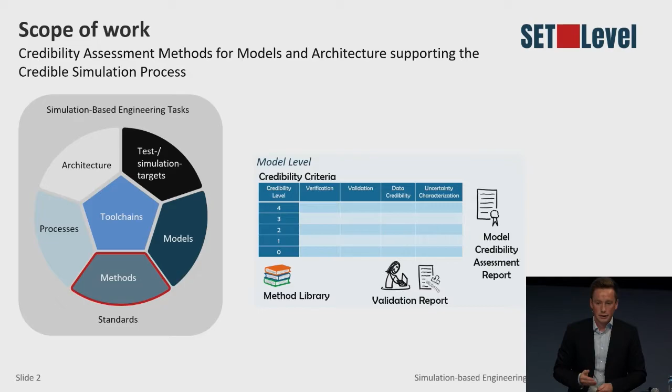For that, we elaborate on different credibility layers, since from our point of view, the assessment of the overall credibility of an automated driving system simulation environment can be structured into verification and validation activities on different levels. As you can see on the slide, these are called model level, coupling level, and simulation platform level, which at the end provide all evidence for the credible simulation process, which is wrapping around all these layers.

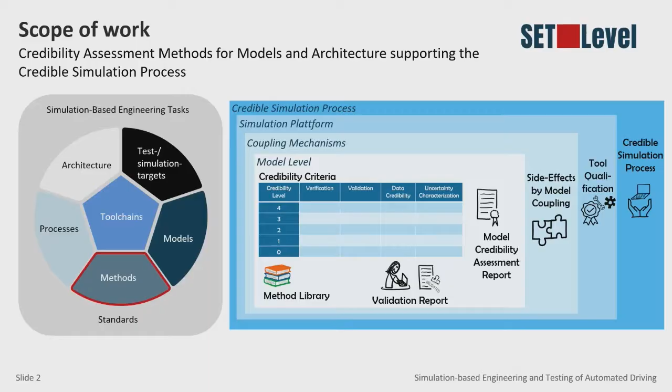So let's take a deeper look at the first layer, which deals with model credibility in the following.

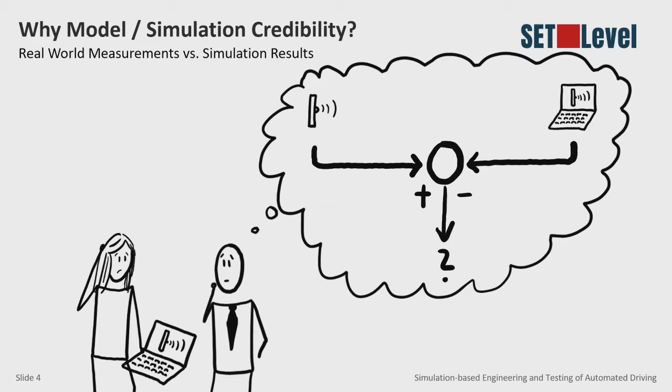I think all of us would agree that using simulation-based methods is inevitable for the safety validation of automated driving systems. However, the intrinsic challenge is that additionally to the actual goal of validating the safe behavior of the automated driving system, this requires a validation of the results generated by the models and simulation itself in advance. And since we know that ADS-equipped vehicles are highly complex systems operating in an even more complex environment, including multimodal interaction with third persons, the question arises: do you trust the results of your models and simulation? And if yes, why?

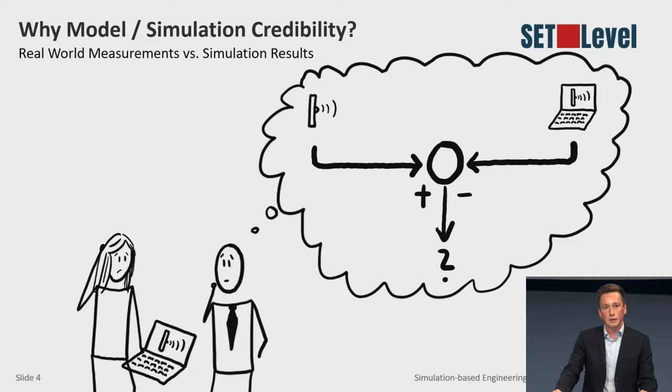Taking a look at the literature, the scientific community, or organizations like NASA or the American Society of Mechanical Engineers, there is a thorough discussion about that topic. The term most often used for activities in this context is credibility of modeling and simulation.

Model credibility refers to the decision maker's confidence in the model. One goal of the validation and verification process is to gain this credibility, for example according to Carson. Credibility is the quality to elicit belief or trust in model and simulation results, according to NASA.

Using these definitions as an example, two major challenges arise. First, determining the degree of credibility is a partially subjective decision that depends on many factors. Second, the decision on credibility depends heavily on the modeling and simulation user's perspective, the respective development task, and of course the application purpose. At the end, the user will ultimately decide whether he or she trusts the model and the simulation results.

So of course the question arises: what can be done to overcome these challenges and to reach that credibility? On the one hand, in our opinion, it's essential that the model developer and the model user interact during the overall model development and operational phase. Thereby, it is of paramount importance that both agree on the purpose for which the model is built and its underlying assumptions.

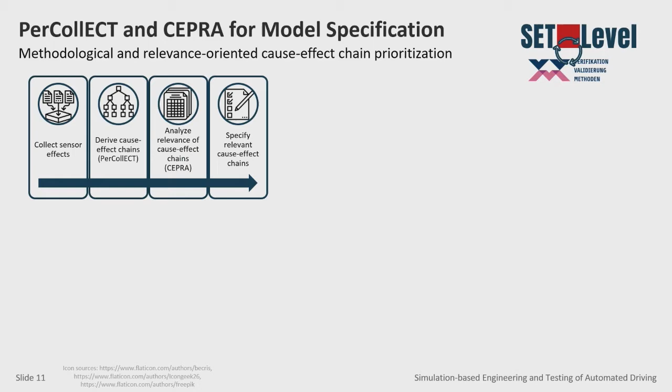So before I start again, I would like to stress that especially the model validation, the LiDAR sensor model validation, was a collaboration between both projects, SET Level and VV Methods, and as Nico said, this is necessary that there is a collaboration between the model user and the implementer. So when we speak about this

four-stepwise sequential process, to repeat, you have to start with collecting the sensor effects, so literature review, or what would be even better is to have a lot of different measurements at hand. You have to sort them in a tree-shaped manner, in this case the PerCollECT tree. We came up with this in the SET Level project to start the overall activities for sensor model specification, because as we started, we found there's no method available, and we need one to get started.

It's also a bit of a timing issue that the VV Methods project was started a little bit afterwards. So even if they used the model and had to specify it and did this exemplarily, we had to come up with something to get it started.

So PerCollECT is a collaborative activity actually, and we've put this on GitHub. You see this not only for LiDAR, also for camera, for radar. We would like to also add ultrasonic sensors as well.

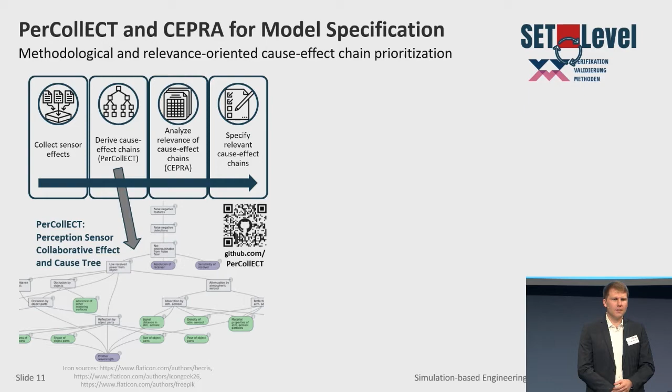And again, you start with the phenomenon or phenomena on the top, for example, false negative objects, and you go down to not recognized or false negative detections in the point cloud, and then down to the causes and design parameters of the sensor.

The next step is to fill the cause-effect phenomenon relevance analysis, to consult the experts for the sensor, to know the ODD, where the simulation takes place, all the different environmental conditions and objects that could occur. And you have to consult a system under test expert or expert group, and then you can derive and sum up both scores for occurrence and for impact, and you finally end up with the relevance scores.

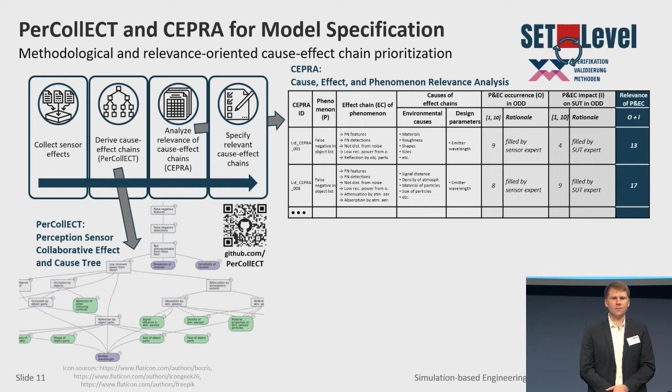And as I said, we are very happy that actually the VV Methods project took this method and all the different steps and did this exemplarily, performing the specification of a model based on this. If you would like to learn more about this, you can still visit the experts at the booth.

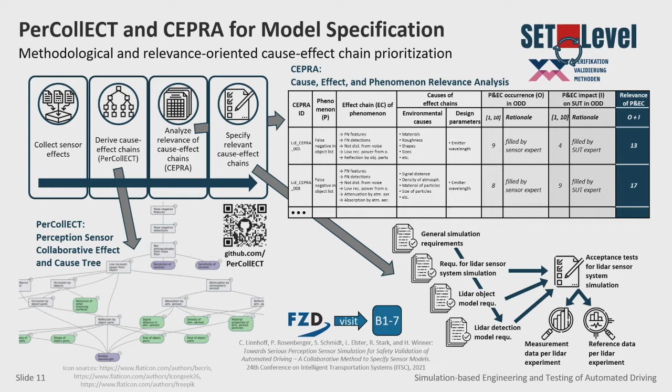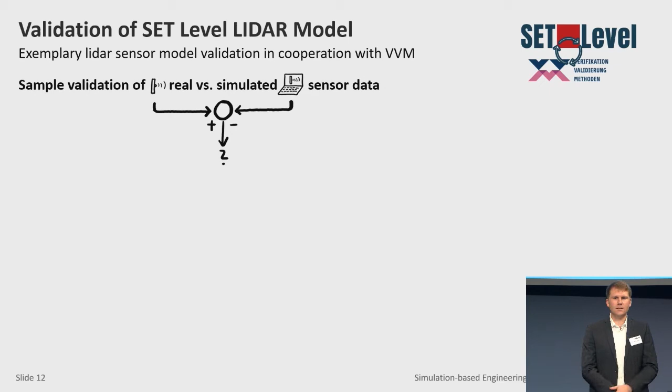The next step is, once you have specified the model, to validate it. Validation in this case means to compare real and simulated sensor data. So how is this done? What do you need? Of course, you need the data collection. You need to collect the sensor data, so in this case, the LiDAR data.

You use tools that are very precise to know where the sensor was located, and you have to collect the reference data as well. For example, the distance to other objects, the object materials, and so on. In this case, for example, for the distance, a tachymeter was also used to have the high accuracy in the reference data that is needed.

Then you need some metrics to compare the real and the simulated data. And in this case, when you speak about sensor data, it's not only to compare specific values and the scattering, but also you have to compare the scattering itself. So there's a model bias, which is the mean error between the simulated sensor data, and there's also the scattering error. So the scattering of the real sensor and the scattering of the simulated sensor, they must fit.

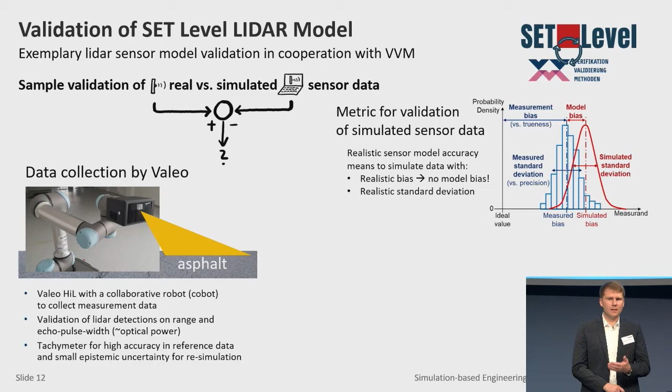And when we started, there was no metric, so we had to come up with a novel metric to use this, and we did an analysis on a lot of available metrics, metrics that were used already, but none of them was fulfilling our requirements, because we needed a metric in the unit of the measurement to be able to actually specify the error.

So in this case, for example, when you speak about distance values of the points, of the detections or the objects, then you need to specify, okay, I would like to have a simulation and it should only be different in the mean error and in the scattering in about, let's say, 10 centimeters or so.

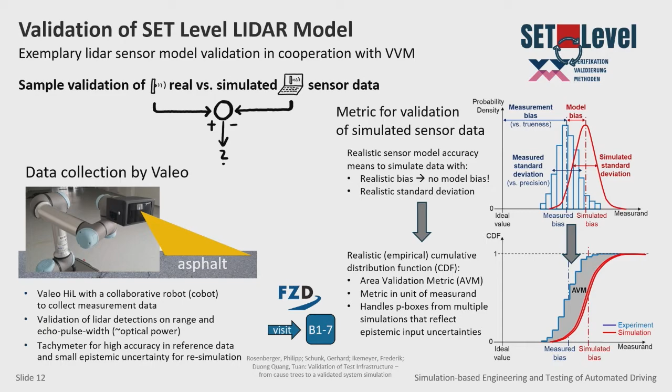And you also need to have a metric that can handle probability boxes from multiple simulations, because you have to reflect your reference data accuracy by multiple simulations for the epistemic uncertainties that are inherent in this. So finally, we found a metric, and it's also possible to consult our expert at the booth for this, or afterwards via email.

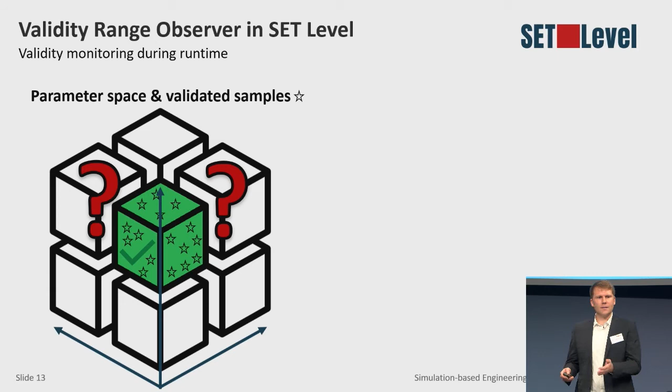If you have different validation measurements done in your specified ODD, you'll have samples from the parameter space. For these samples, you took measurements and can compare them against synthetic data, so in this case it's valid. But it's not enough. You also need to know about the rest of the parameter space where you have no samples for validation. So somehow you need to know if your model is still valid there as well.

The validity range actually cannot be guaranteed a priori. For example, in closed loop simulation, you start with scenario conditions like different velocities, different distances to objects, different objects, materials, and environmental conditions that can change. If you just have open loop, you can probably check beforehand if all the different parameters are still checked and the model is valid. If not, you need to observe this, and monitoring model validity is then required.

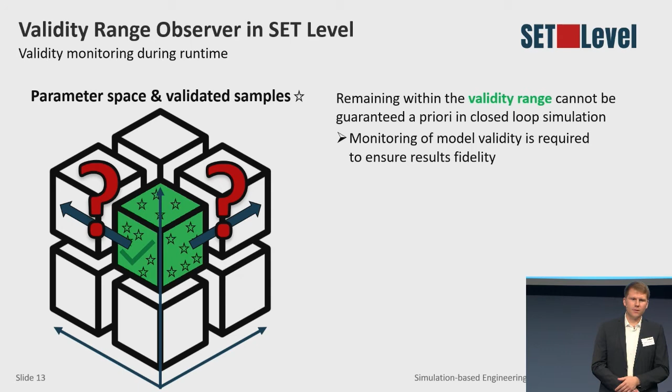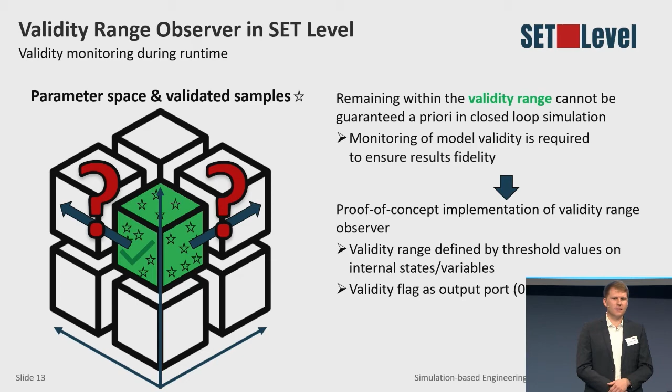A proof of concept of this implementation, in this case for vehicle dynamics, has been done in the SET Level project. The validity range in this case was defined by threshold values, internal states and variables. There's a validity flag, a simple approach to output whether it's still valid or not valid anymore. Again, please visit the experts at the booth for this.

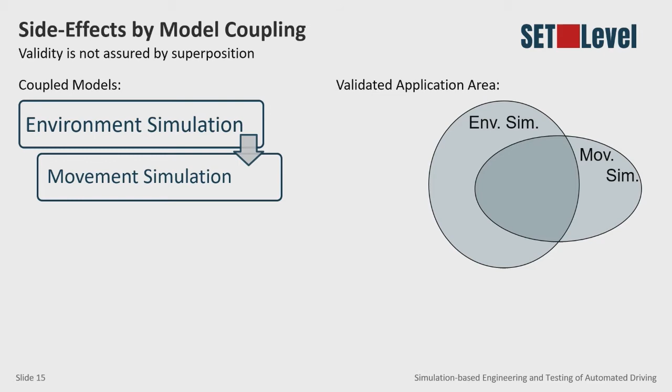So the next step, once we have all this done, we have the different models validated, and we even know about their validity during application, we will combine different models. What are the side effects of model coupling? In this case, for example, you have an environment simulation, movement simulation of different objects, vehicle dynamics, sensor simulation, and the system under test, in this case an automated driving system, all in closed loop. So yes, every model has a parameter space where it's validated and fulfills the requirements, but what about coupling all these?

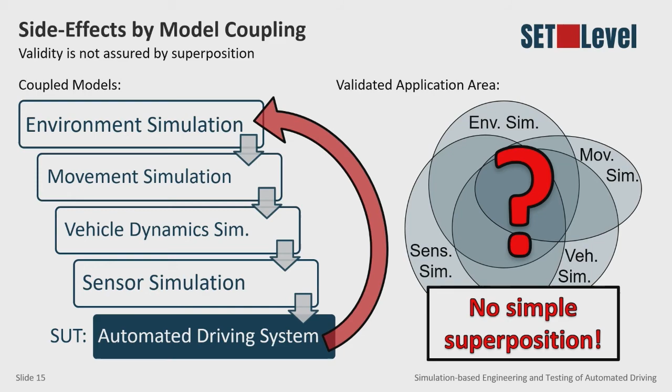Of course, it's not just a simple superposition where we know all of their validity areas and can just combine them. We have to investigate this, especially when we talk about models from different developers and sources, for example provided as functional mockup units, as we did in this project. They're black box systems, you cannot look inside, you can just couple them, and you hope they are valid, or at least you should investigate if they are valid or not.

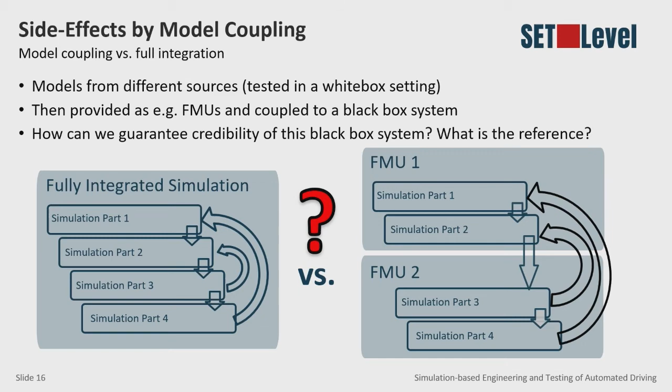How can this be done? This is a question that came up during the project. We did some first investigations, of course. You have different types of model coupling. For example, you have one model for vehicle dynamics all in one FMU, and you just separate this into two, and we investigate. Of course, we find there are deviations. But in this case, it's not just small deviations, it's actually deviations that really matter during simulation. This is a finding that is very important, and we want to stress here.

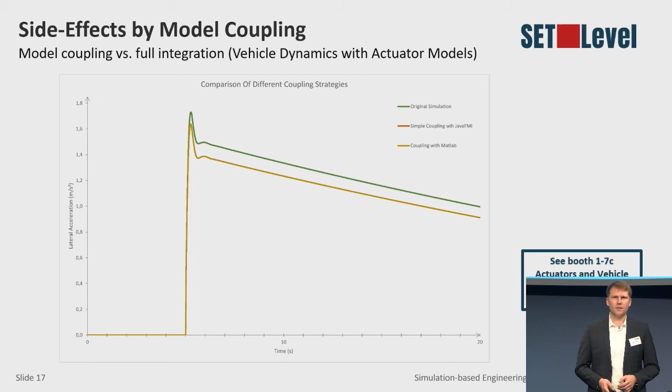Of course, we have experts available today or even afterwards, you can contact them, and this is very important. So another aspect of simulation credibility: again, we are not finished. We have a simulation platform running, but we need to qualify the tools.

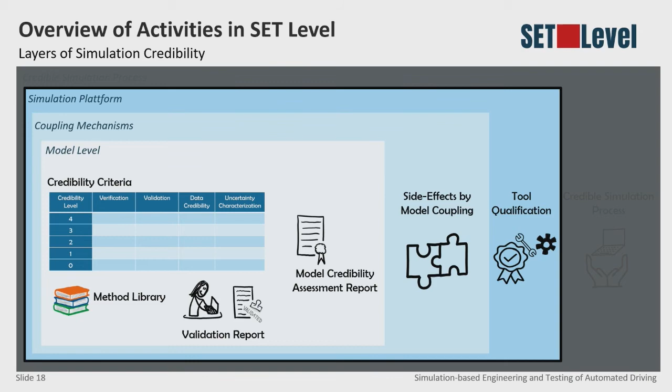Tool qualification doesn't only mean you have synthetic data compared against real data, or you have coupling. There's even more happening: data management, test automation, all the parameterization, and visualization takes place, and all this is included in the tool. There are further assessment categories involved too. Of course, there are standards available telling you how to do this and what to consider, for example the development process, bug report handling, customer information, user manual. All this is also included in the tool and must be considered to have overall credibility of your simulation.

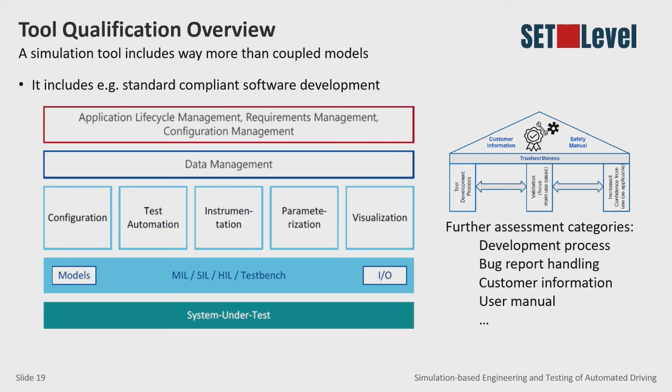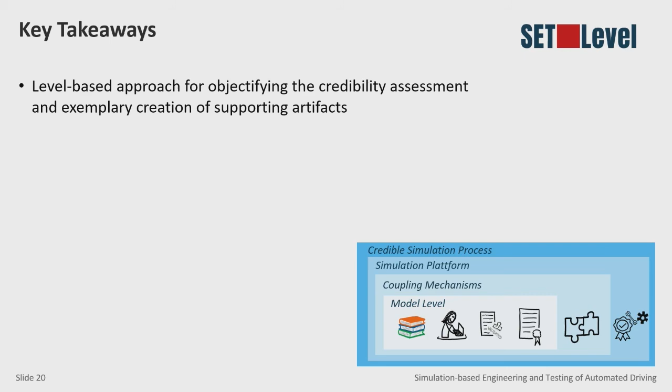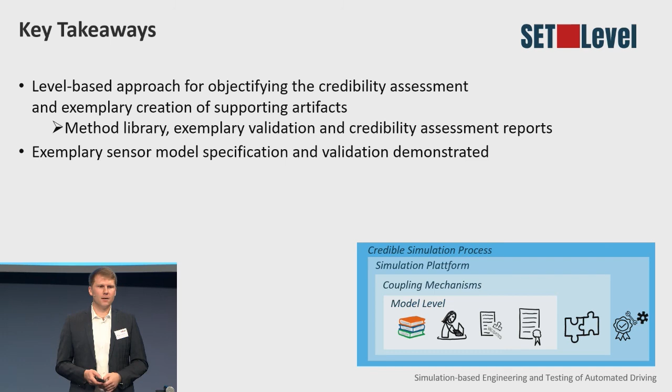So let's come to the key takeaways. At first we showed a level-based approach for objectifying the credibility assessment, and exemplary creation of supporting artifacts has been shown by Nico. A method library, exemplary validation, and credibility assessment reports are provided. Then I showed exemplary sensor model specification and validation together with VV methods. Validation metrics have been proposed, and they address the different uncertainties.

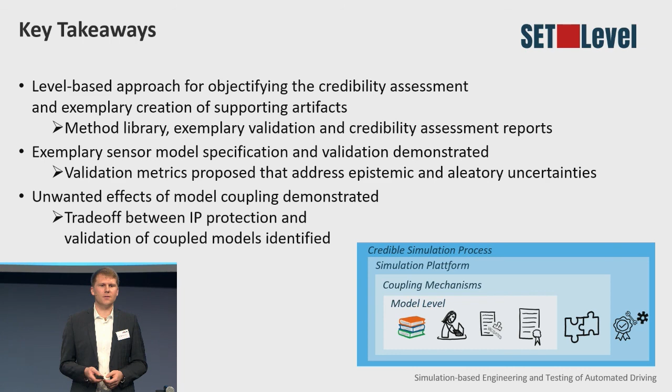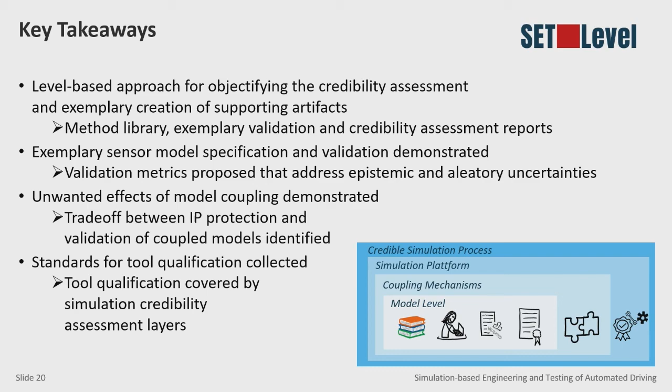Unwanted effects of model coupling have not just been estimated but also demonstrated, and it's worth noting that there's a trade-off between IP protection, so black box FMUs, and validation of coupled models. Then I showed that there are standards for tool qualification. We have collected them, and this must be covered by the simulation credibility assessment layers as well. So thank you very much, and now we are open for questions.